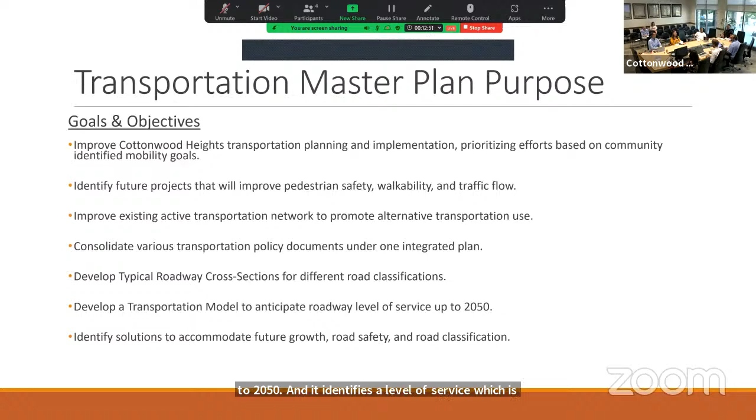The transportation model goes up to 2050, and it identifies a level of service, which is kind of how well the road is functioning with all the cars that are on it. Adam, can you tell them what the letters mean, like the A through? Yeah, I have that, is that going to come up? There's a slide that shows that, yeah.

So first off, what was the data that was used in the model? What you can see up here is a population graph that shows over the years the population of Cottonwood Heights based off of the census data, and then it takes it out to 2050. You can see the estimated population of 41,800, and that comes from the gravel pit. Most of the growth is shown from the gravel pit.

Now the TAZ model, it says at the bottom, uses socioeconomic data. What that means is it includes the people living in the zones. If we go to this, this is the TAZ map, and this is the 2050 population. So it includes the people that are living in the area, but it also includes the economic opportunities, the businesses, the people that come into the area to work and shop. So it includes not just the residents, not just the population, but it also includes employment as well. So this is the map.

Does that include commuting as well, just some of the main arteries? Well, the commuting shows up in the traffic counts. Okay, so if they're going through the city, it wouldn't show up in the TAZ model. But there is the way the model, Wasatch Front makes this model, and it includes the whole valley, and the different zones influence one another.

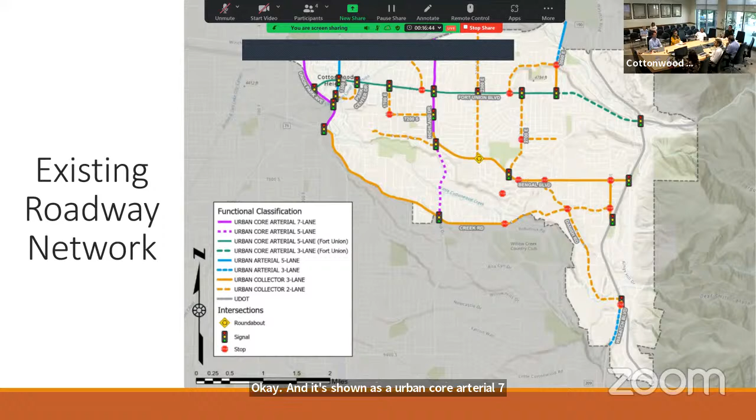Adam, is Highland Drive ours? Yes, Highland Drive is a city road. Okay, and it's shown as an urban core arterial 7-lane and urban core arterial 5-lane. The only road that's not ours is Wasatch Boulevard. SR 210 and SR 190 would be UDOT roads.

So these are the updated cross sections. You have the local 2-lane, local is going to be your residential road, just your local street. And then 2-lane urban collector with a bike lane and no parking, or 2-lane urban collector with parking. The 2-lane urban collector, that's 2700 East, 2300 East, Danish Road.

Can you tell us what is a bike lane? So a bike lane, there's a lot of different types of bike lanes, but a bike lane is a lane designated for, I guess I'll just say alternative transportation for bicyclists. It's different than a sidewalk because a sidewalk would function for pedestrians. And then you have other functions that have both pedestrians and bicyclists. But the bike lane in the road would function just for bicyclists.

So, yeah, part of my issue is when I'm on a bicycle and I think I'm in a bike lane, cars think they also own a lot of that.

Yeah, and so there's different types of bike lanes. There's shared bike lanes where the road is shared between the automobile and the bicyclist. And then there are type 2 bike lanes, or dedicated bike lanes, where there's actual delineations or striping markings, right?

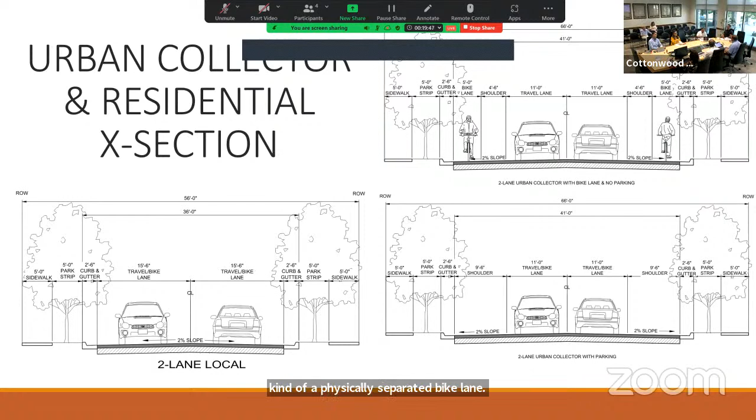This is a 3-lane urban arterial. And the 5 and 7-lane urban arterial, those would be 13th East and 30th East. And they're pretty much reflecting what's already existing.

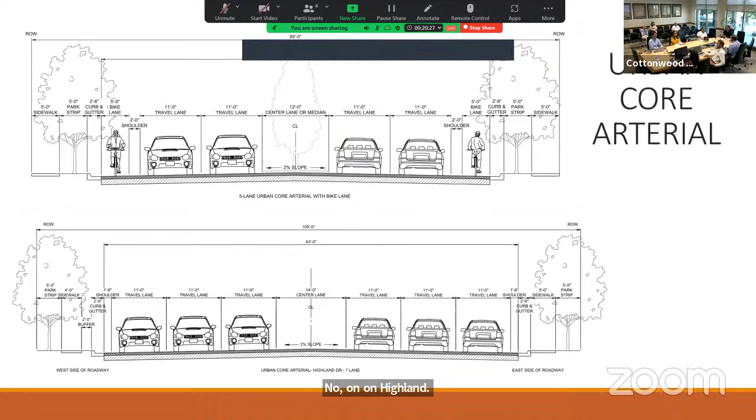And then, so this is Fort Union. You can see what we have here are two different cross sections. The one at the bottom is the one that Mike is referring to, with the bike lane outside of the roadway. This is planned to go in from Union Park up to, is it up to 30th East? I would believe, for the most part, yeah, so up to 30th East. So that's showing a 6-foot sidewalk and a 6-foot bike lane on both sides of the road, along with the park strip, so that would be a shared use path with room for both pedestrians and bicyclists.

And then above that, the urban core arterial Fort Union 3-lane is from 30th East up to Wasatch Boulevard. And this cross section is showing a bike lane in the roadway, and it's also identified a multi-use path. It shows it as 20 feet, but that's kind of the area, the trail itself would be 10 feet. That is a planned improvement from 30th East up to Wasatch Boulevard on Fort Union on the north side of the road, and that would connect to the Big Cottonwood Canyon Trail.

So Adam, just reflecting on that, how much of this is completely congruent with the Fort Union master plan in those segments? So that bottom one comes from the Fort Union master plan, like the dimensions and all that. Yeah, what this is essentially is the Fort Union master plan, very high level, saying hey, these kind of things would be cool.

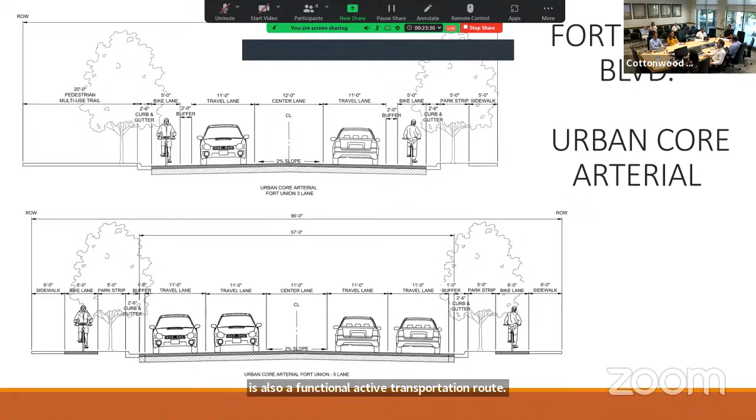So I believe that's shown on the Mid-Valley plan. I think that is, yeah. So all of these documents have iterated and gotten more detailed, from the Fort Union plan to where we are now. That's why when we start doing any development along Fort Union Boulevard, since we're doing this all in one big chunk, you'll hear that from me every time we talk about any project on Fort Union. Are we asking the developer to incorporate the Fort Union master plan in terms of what they're building out, what the curb and gutter looks like, so we can at least idealize different segments if we can't connect it all right now? Anyway.

Very good. So this process of the transportation master plan is a high-level look at the traffic in the city. It included, like I said, the Wasatch Front TAZ model, and then it did an analysis on the roadway and intersection level of service. That was based off of the daily traffic volumes that were collected. It's not a synchro model—that's more of a detailed look at the intersections. So this study is more about the roadways, although we do make recommendations for intersections.

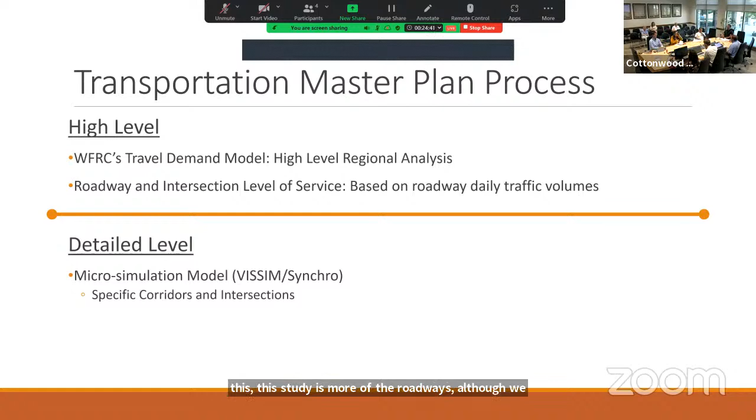Now, level of service, you guys mentioned level of service. Level of service represents the congestion and delay on the roadway or the intersection. The best level of service is an A, and a severely congested level of service is an E or an F. So everything up to a level of service D, according to the engineers, is considered acceptable. It's where you start to see failure once you get into E and F.

But that's based on those daily counts, right? It's based off of delay, right? Got it. And then there is an attempt to just look at the roads. So right here, roadway level of service—this is the acceptable range. These numbers are assuming a level of service of D or better. So if you get higher than these numbers, then you would consider that level of service to be unacceptable, if that makes sense.

What months do they do these studies? So the data that was collected was mainly used from data that the city had previously. We collected data—Horrocks Engineering, who is the engineer that put this report together and did the model, collected this data mostly back in 2019, but then there was also data that we had that UDOT collects on an annual basis, based off of a number of different sources. I believe what UDOT does is they have a factor based off of the date to adjust it—an adjustment factor for any seasonal contingency. Yeah, it's a seasonal adjustment factor.

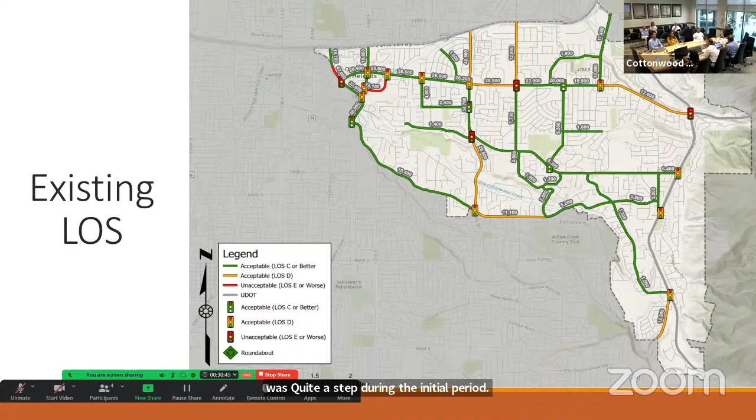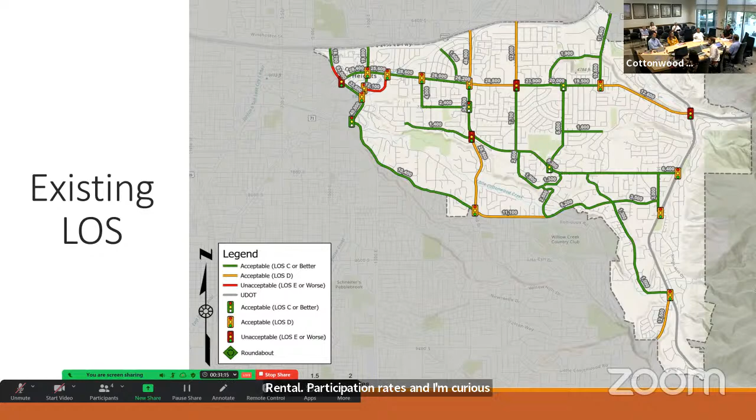Yeah, that was kind of my knee-jerk reaction, that's probably the case. The other question I'd have on the traffic data and projections is there's been a lot of talk in the Wall Street Journal, et cetera, about commercial rental participation rates. I'm curious, as Gen Z gets integrated more into the workforce, will the models for in-office versus remote versus hybrid hold true? Because I assume all the modeling is based off current traffic flows and current workforce participation in offices, and that may not hold true going forward.

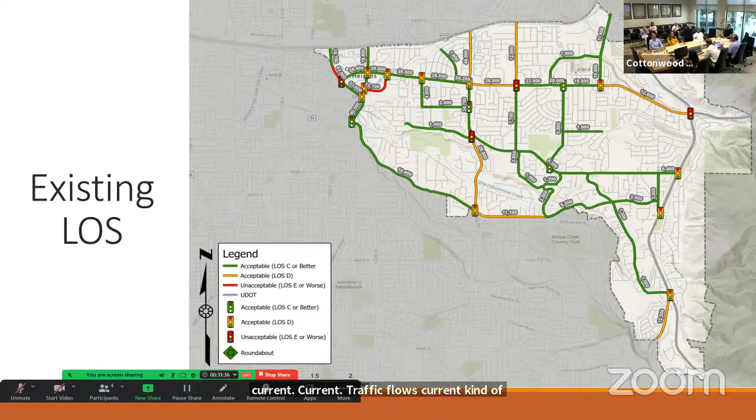Yeah, that's a good point. Just making observations from Wasatch Front's regional transportation plan, their valley-wide version of this—they always project out, you'll see this one projects out to 2050. They plan in 30-year chunks, always looking 30 years in advance, but then they update that plan every 2, 3, or 4 years.

I think by updating that fairly regularly, you catch those trends over time, because you'd see changes in those area-specific population models. If those offices are suddenly more vacant during the day, that would be updated in the TAZ model.

So I think what's important is we try through the general plan and other methods to proactively plan for changing trends in the market. But when we look at the actual data, it's probably more important than anything else to make sure we're updating this plan on a regular basis instead of waiting 10 or 15 years, so we can catch those trends as they're happening and change the plans right away instead of responding retroactively.

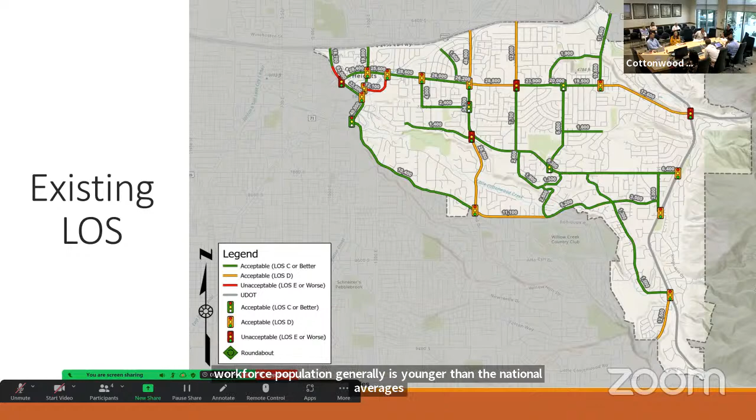Yeah, one of the things that always sticks in my mind—I haven't looked at it in a bit, but I think the Utah population and workforce generally is younger than the national averages. So then it becomes this question of what happens with that, because what work looked like 20 years ago certainly isn't what it looks like today, and is it going to look the same 20 years from now? But as long as we're planning for that, I think that's all you can really do—it's just a good guess, or best guess.

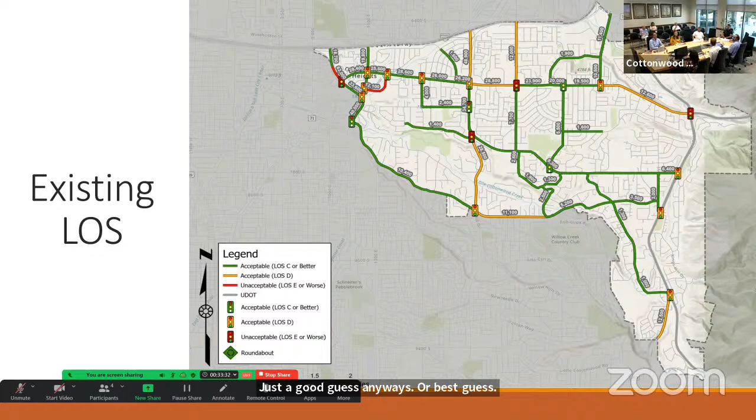Yeah, I think that to me is where the importance of public works and engineering collaborating with land use planning, collaborating with active transportation planning comes in—trying as much as possible to make sure all these plans speak the same language and are on the same page with each other. Then they're trying to proactively plan for the same trends we see evidence of now, so we can put things in place, and as things start happening, we can continue to update everything cohesively and make sure we're responding appropriately. Thanks.

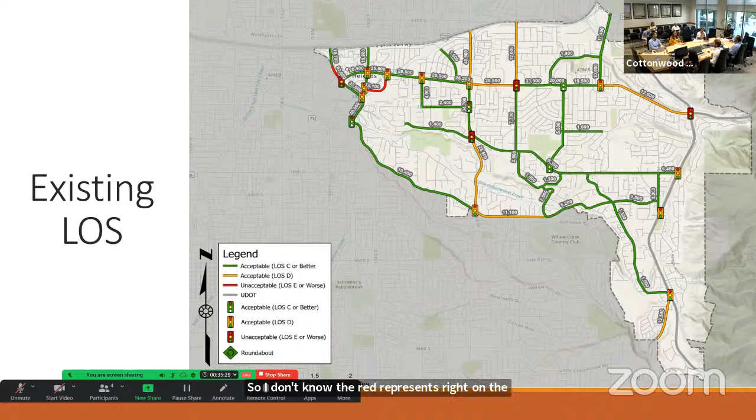It really is. I joke that that's where the line is for Chick-fil-A and In-N-Out, starting right there at that intersection. They've woven all around the Walmart parking lot, taking it out into the street. I'm sorry, I didn't buy a Chick-fil-A franchise, but the other thing I'm thinking is, I don't think we have any idea really what life is gonna be like in 2050.

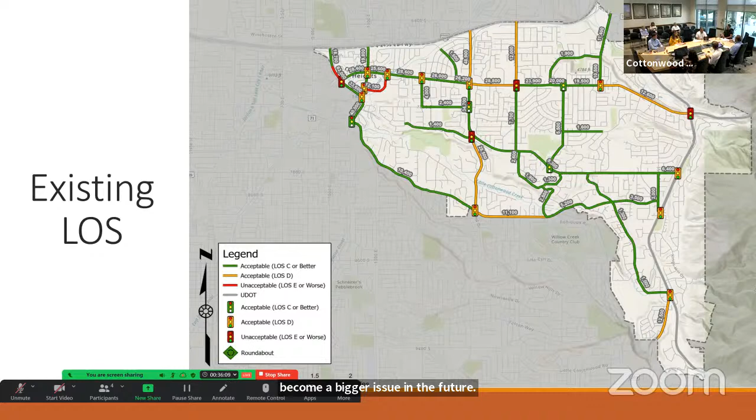So I agree with the idea that we do the best we can and then adjust as we go. But one of the things I anticipate is that, like electric bicycles, we're seeing more and more every day. I think the bike lane issue may become a bigger issue in the future when we have more people on bike lanes, and less people in car lanes.

Sure, and I wouldn't be surprised to see that happen. We have one city council member that is highly passionate about that, and I love my bike too, but I do think that as we overcome the hills with electric bikes, we'll see more of those bikes, and I appreciate that that's woven into this quite a bit.

The other thing I might point out, a new variable that's just popped up, is that we've now acquired a piece of land at Hillside Plaza, and we don't know exactly what that will be. Will it require the traffic flow of an In-N-Out and a Chick-fil-A, or will it be more quiet, more residential-ish, or somewhere in between? Hard to anticipate. As those plans are updated, this can be updated as well. It's kind of like a living document that can incorporate future plans.

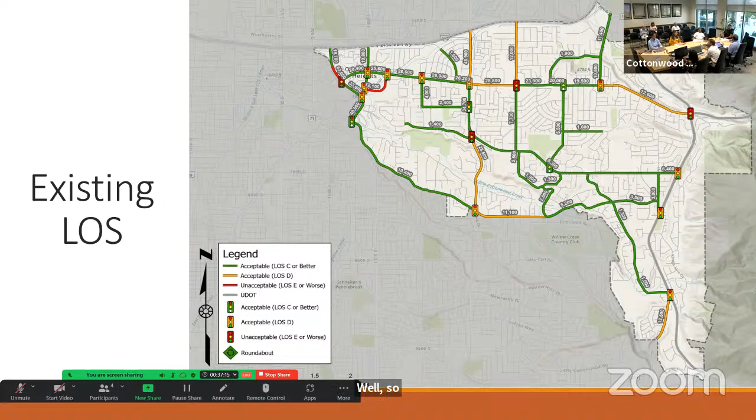I really appreciate how you guys are addressing this. Have you thought of any BRTs in the east-west corridors? Well, the Wasatch Front, as Mike said, has a long-range plan that includes transit, pedestrian or transit roadway, and bicyclists. So there is a transit plan, and I believe, just off the top of my head, what Wasatch Front had identified was BRT, but I don't believe it was in the first phase. I think it was more in phase 2 or phase 3.

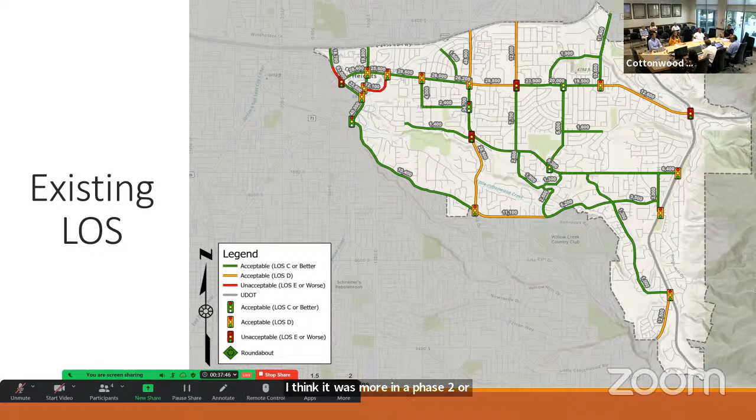That's how I'd put it, I'd have to look into it. Yeah, I just see a need for BRT, especially with the east-west corridor. You can see it's very mixed on Fort Union, and seasonally you get a lot of mixed congestion there. I think if there were some good central hubs, especially with the amount of parking closer to Union Park and proximity to the freeways, a bus rapid transit system could be very interesting there, especially if we're going to, what is it, a 5-lane or 6-lane extension for Fort Union. Is that kind of the plan, for 40 years?

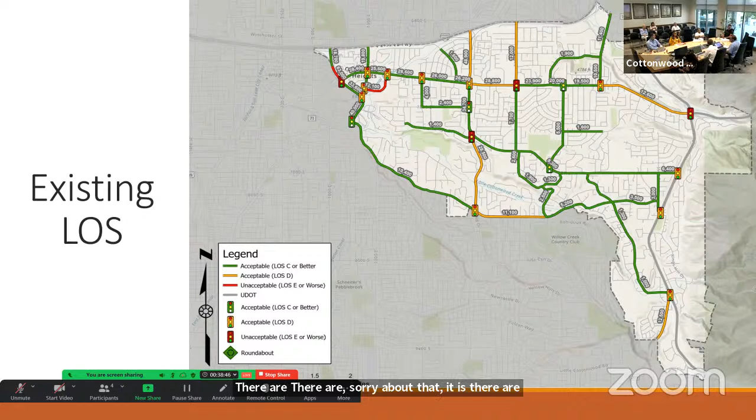We can get to the recommendations in a minute, but just a spoiler: there are no lane improvements showing new lanes, except for what would you call it—sorry about that—there are operational improvements that include shoulder widening, intersection improvements, bus turnouts, turn pockets, and center medians, but we don't have a lot of projects recommending an increase in capacity.

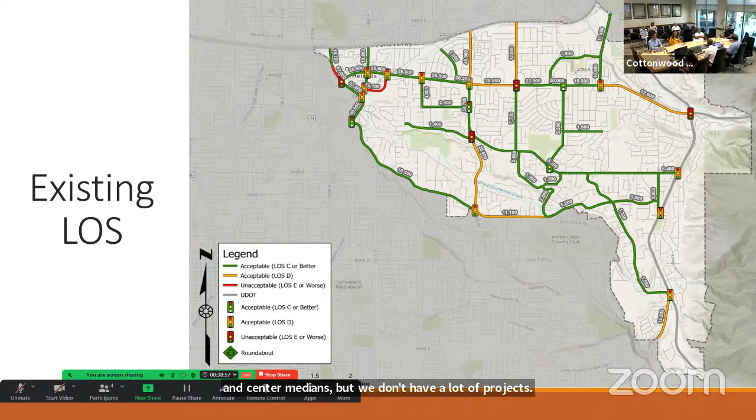Okay, but let's get to that. So this is the existing level of service. This is the no build 2032, which is what it would look like if nothing is done, according to the model.

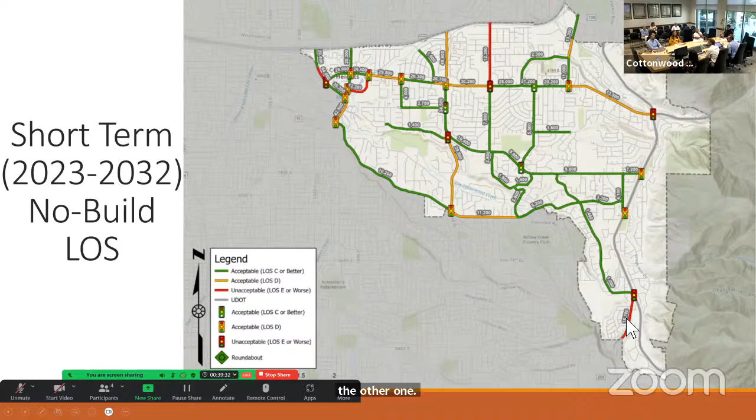I think 2300 East has turned to unacceptable, but it's really just an increase of 300 cars, so it's still just on the cusp. Wasatch Boulevard is the other one now shown, at 15,700. So these are just kind of on the cusp.

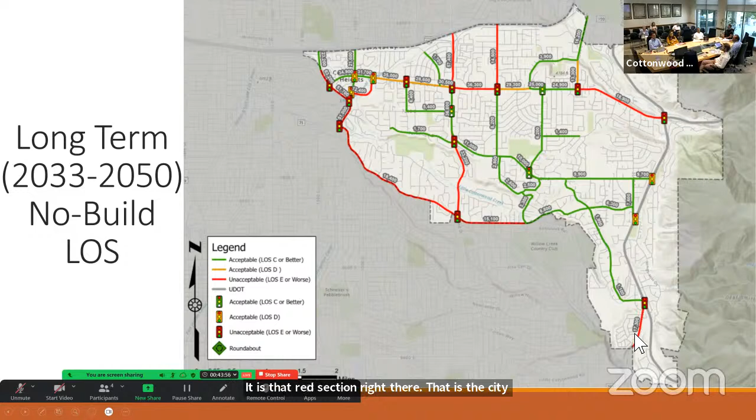So 13 million for that section? Well, that seems like a small number of people in the city who are benefited. I would take that road improvement off — what I'll do, don't look at the numbers, because those will need to be updated. It's just like incrementally, the first four numbers put together to equal that. And in terms of the number of... yeah, that's something I will look into.

I'm not — as a cyclist, I'm okay with the status quo. I know he put it in based off of the inflation, but people don't... they've got a great walking system in their development. I'd love to hear from them if they feel differently, but anyway, thank you for that.

So, yeah, we will take a look at the estimated project costs, because those could be refined. Also, as I was saying, all of those roads are operational projects, not recommending additional lanes.

All as operational projects. Let's pause for just a second there, because that's a lot. Thoughts, questions, comments? I think that's awesome.

My only thought process behind this is being able to blend UDOT's and potentially some of the adjacent communities' adjustments to this plan as well, from a countywide standpoint, because I believe specifically Highland Drive and Wasatch, as well as parts of Fort Union, are massive commuter corridors for us. I think some of the data we're pulling is more so discussing the current residents' data, and I think we're seeing a lot more traffic from Draper and Sandy.

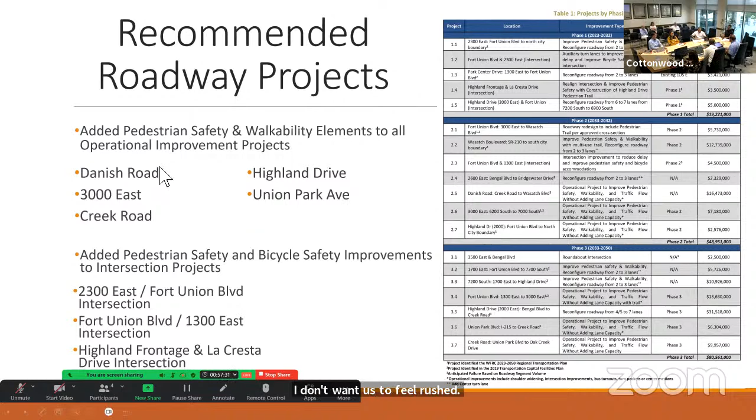So well, let's just show you the rest and decide, okay? Especially since this will go to city council, and this is probably our main bite at the apple. So this we already saw: projects to meet future demand.

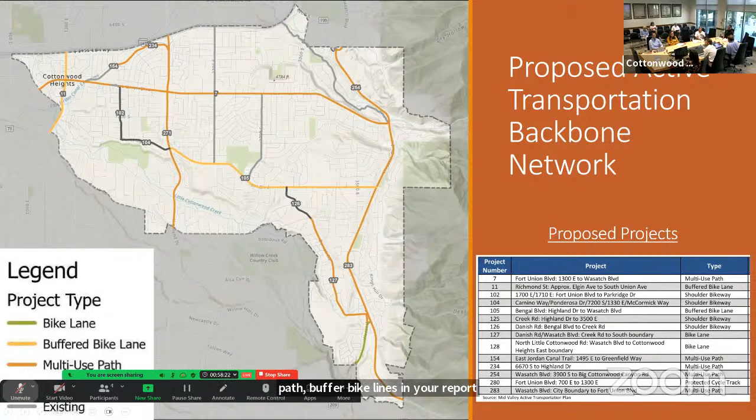In your report, there is a map showing the existing backbone network. And that is it—that was the last slide. So are there any other questions? There is more information in the report if you have other questions.

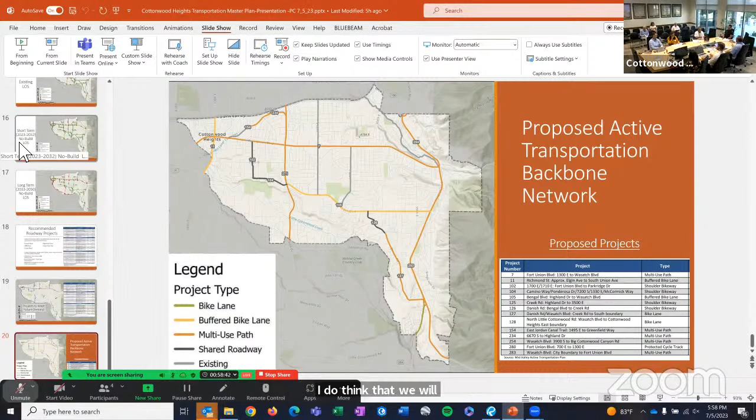I do think that we would probably enjoy a little bit more discussion. Commissioner Ebler, do you have a quick question, or do you want to forego that for a future time when we bring it again? Just a really quick comment, just looking at the level of service map at 2300 and Fort Union.

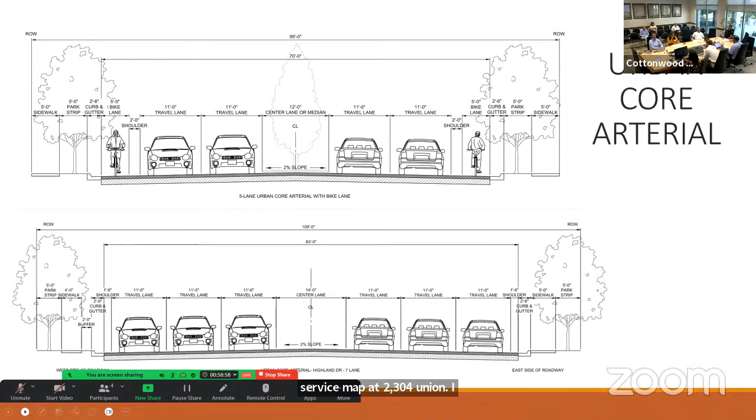I think I heard Mike say that there was funding towards that, so I'll just kind of reserve that. But if the intent is to really turn the development into a pedestrian-oriented town center, you've got to pay pretty close attention to the traffic interaction there, especially given that the level of service for the stoplights is unacceptable, and you have level of service D basically boxed in around that. So just a quick comment.

I'll put a pin in it. And we really do appreciate this, especially given the last newly formed road in Cottonwood Heights through the Racquet Club property. It was the first time we formed a new road in terms of the city, but with the possibilities of Racquet Club, the gravel pit property, and the Canyon Center property, we've got some big stuff.

So making sure that there's alignment between parks and trails, open space, this group, and staff, making sure we can all sing off the same sheet of music as you guys interact with possible developers and look at these opportunities. I think us being unified as closely as possible will bear fruit. So thanks for your patience with us—I know that was a lot.

Question for the commission: do you want to see this back specifically in the work session, or should we proceed? This has to go through public comment at the planning commission as well. It can be there as long as you want it there. Would you like to proceed to that public comment phase to start getting input, or bring it back for more work session discussion?